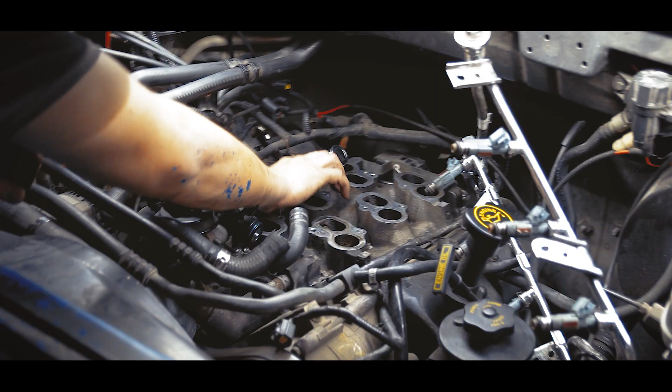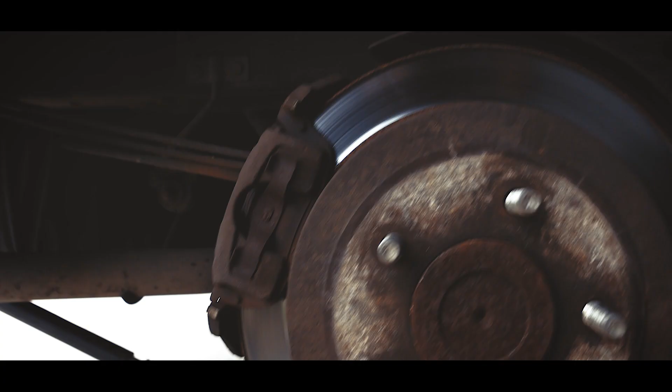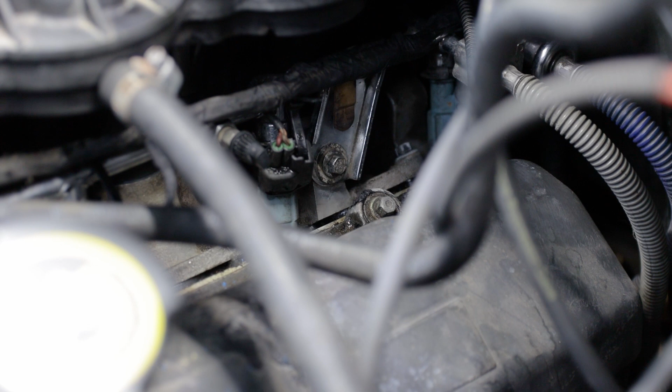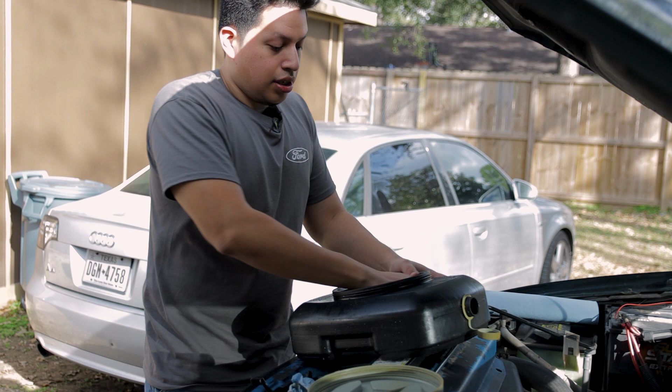We're gonna work on this on our 2001 Ford F-150 4.2 liter. We were looking at codes, trying to figure out why we keep getting misfires, and so now we found in a clip where we had an air leak on the intake gasket. So now we're gonna replace that gasket and make sure we put in the gasket properly, and show you the process of how, what to do, what not to do.

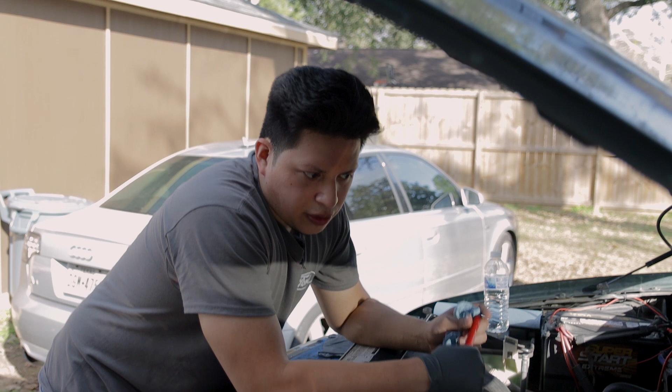So in order for us to remove the intake gasket on this, all this will be removed. So all this, like the plenum, all the air intake and so forth, you can see that part in our previous videos, like the one where we remove the control runner, and some other previous videos that we have. They'll show you the process of how to uninstall this.

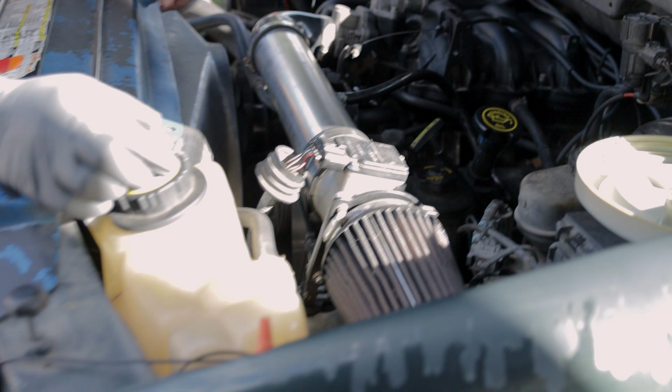Since we're gonna have to remove water for this case, obviously you remove your cap to release the pressure, and just to be safe, you don't necessarily need to. We're gonna remove the battery from the negative connection, and that'll be it.

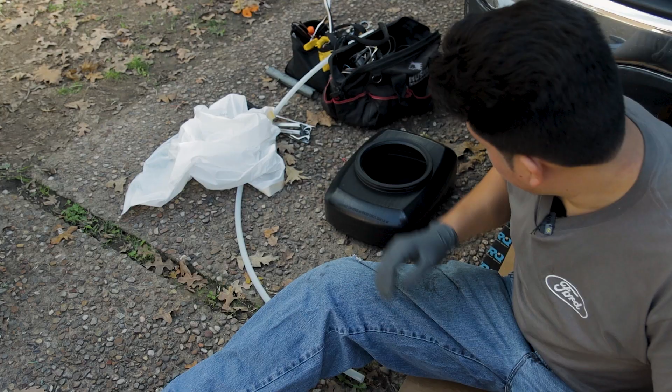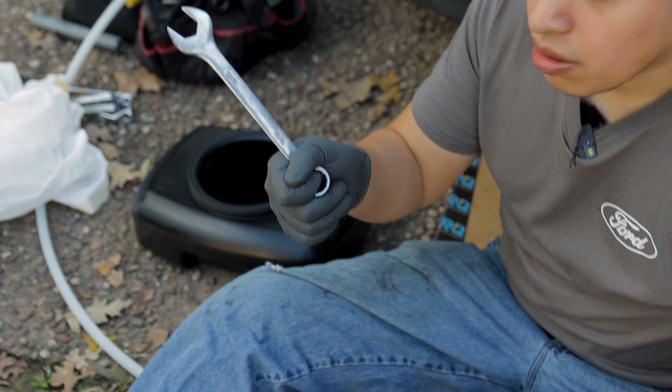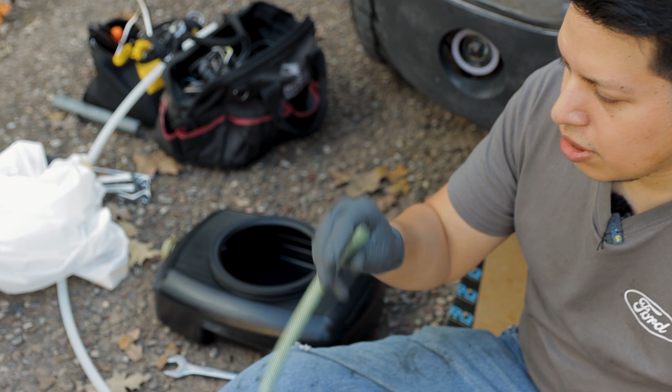All right, so we're gonna drain the coolant. You're gonna need at least a pan, you might need a bigger one than this, a 3/16 wrench to untighten the petcock, and then a little hose so you won't be spilling everywhere. It has a little drainage inside. We're gonna try to show you in a bit, but just to get you an idea, you have a little drainage, literally facing that way, so stick it in there.

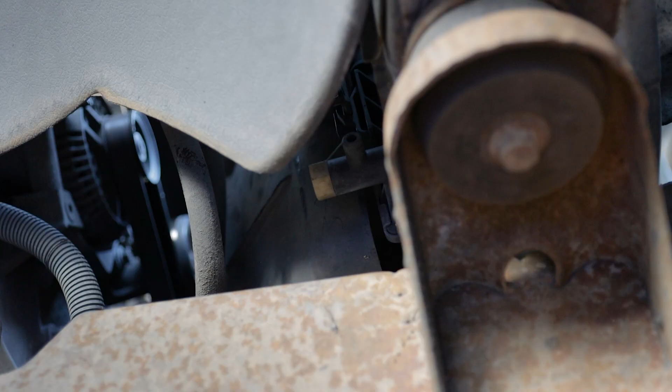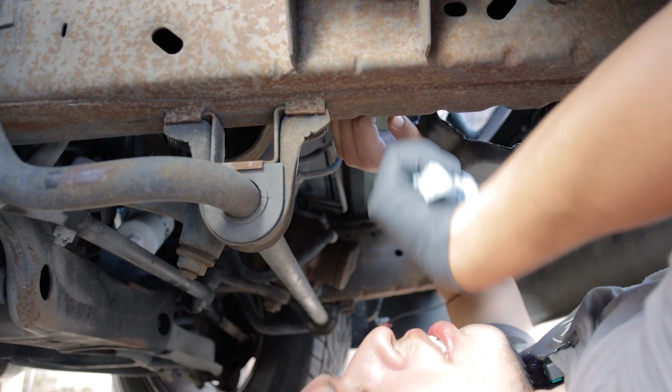All right, so here we have the petcock. It's right here, obviously on your passenger side of the vehicle. If you're not too familiar with it, you could just look at the radiator, and it's normally passing this part of the chassis upwards. So if you look towards the chassis, it's literally on top of this, as you can see with my finger, here, and here we have the little drainage.

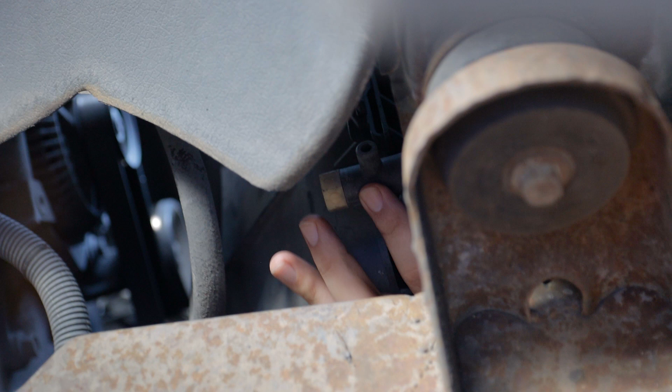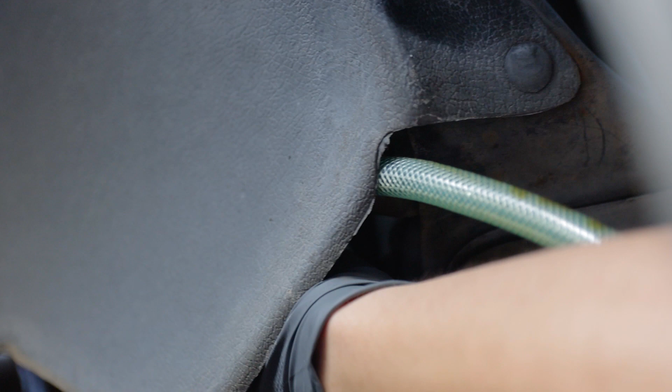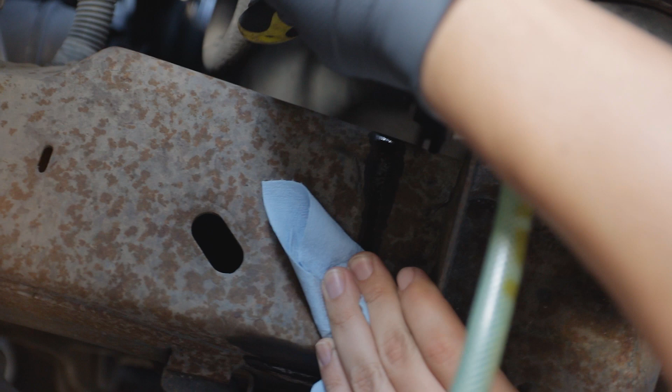I'm gonna stick this here. In case you're wondering, I think the diameter of the hose will be a little bigger, half an inch, as you can see with the little petcock nut. You don't have to remove it completely, just enough to where you'll start seeing the water coming out on your end. You might also see near where you're loosening up the petcock it starts draining a little by drops. So watch out for that and don't let it get in your eye.

And so here we go. That's all the water we have now.

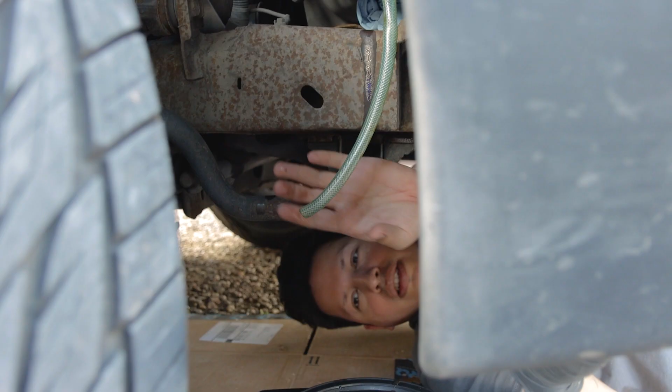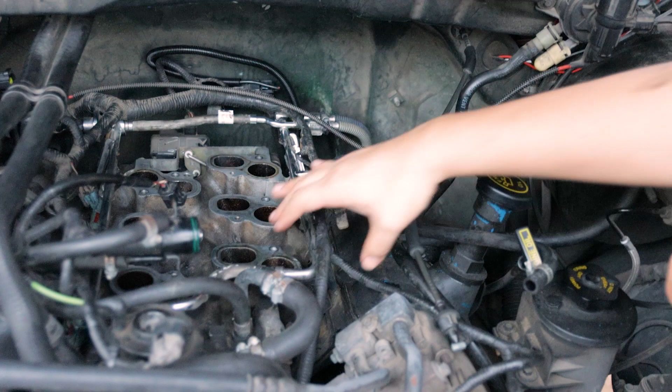All right, so we have removed the 4 screws from the fuel rails, they're 8mm. Once you remove them, this is basically removable. Right now we're gonna try to see if we could remove the intake without having to remove the fuel rails, but there might be a need that we have to remove them.

So first we're gonna start removing this hose, this hose as well, and this hose that touches the thermostat, and this little hose here. They're gonna have to be removed. So make sure that your coolant has finished draining. If not, you might wait, or if you don't want to wait, you could just go for it, but you might have some spills, so we're gonna do that now.

So as you can see, on most, if you haven't replaced these, your most original ones, they're gonna be clipped on, so you're gonna have to use pliers or something like that. I changed all of them to screws because it just makes it way easier to remove. But most, if I'm not mistaken, most of yours will still be the little clips, and you're gonna have to use pliers.

So just like I told you, move this one, and this one here, and that's it. So this is one of the hoses removed, this one was from here, as you can see it was removed. The one from the thermostat was also removed, and this little one here, which is this one, was removed.

Normally it's probably easier for you to remove the fuel rails from these ends here. We didn't do it, I guess you could say we were being a little lazy, but we went to play around and move through the cabling, because this side normally is all completely loose.

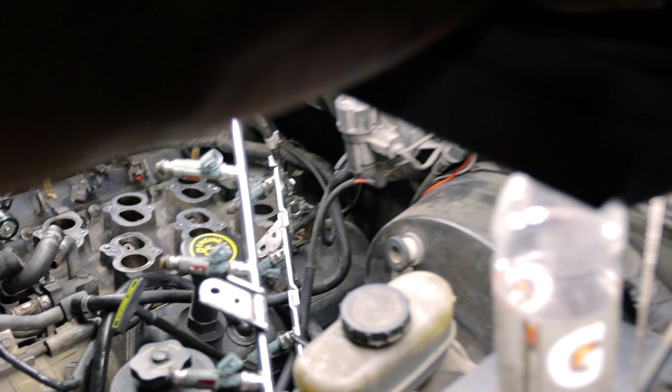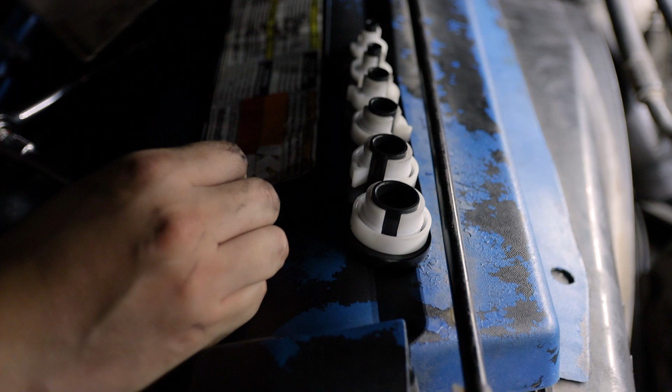So we can do it this way, but in case y'all do want to remove it, these are the tools you'll use. The big one we used, if I'm not mistaken, one of these two little ones, and that's the part number. In case you want to remove the fuel rails, you don't need to, but it's up to you.

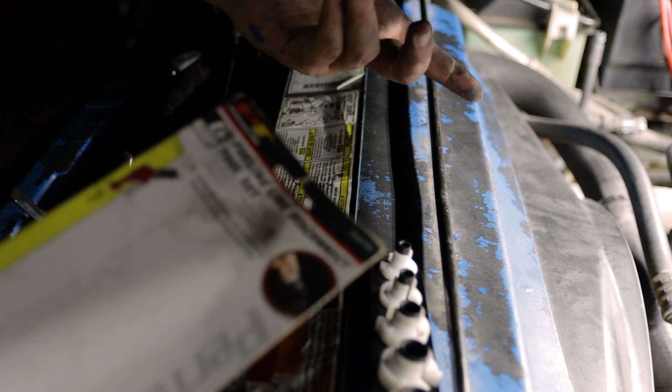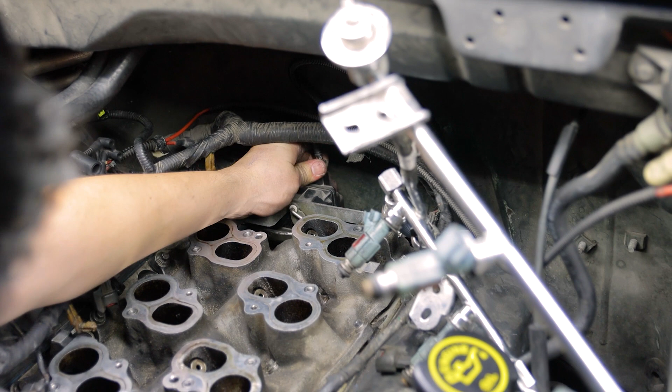Now we're free to remove the intake, and it has about, don't quote me on it, but about 13 screws. So it's one here, 1, 2, 3, 5, 6, 7, then 8, 9, 10, 11, 12, and 13. About 13 to 14 screws, and they're 8mm. Once you remove all those screws, don't forget to disconnect this right here, the control runner motor. And then it has like a little clip there. Remove it, and you should be set to remove everything.

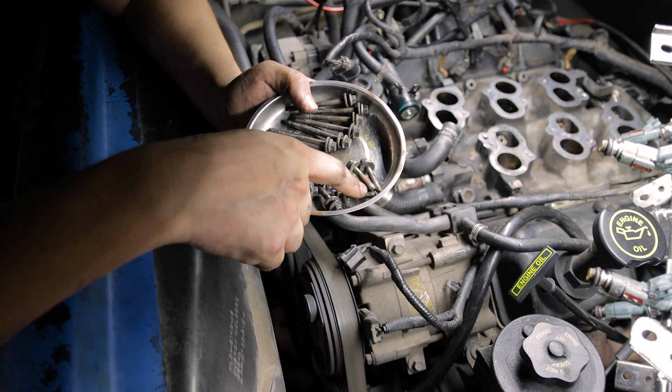All right, so we have a total of 8 screws. As you can see, these little ones go mostly on the edges, and you'll also have 2 small ones—one that goes here, and one that's way in the bottom, so you're gonna have to feel that one out. And then you have 7—I'm sorry, I'm lying. 1, 2, 3, 4, 5, 6 of the ones in the middle. So try to remember that the big ones go in the middle. How many in total? In total you have 14 screws, so make sure you have 14 screws—6 of the long ones and 8 of the little ones.

As we remove all the screws, now we're going to remove this. It's ready to go. Sometimes you might need a flat head or something like this, because it might be really stuck in there. But once it starts like this, you can move it. So this one you might either need 2 hands or another extra person. Also be careful because it will have water in it, and you don't want it to go into the heads or anything like that. Make sure to pull it out as much as you can, and make sure everything is moved out of the way so it's not gonna be in the way for you to remove it.

So let's see if I did what I just said. I was trying to remove this, but it turns out I do have to remove this because there's not gonna be enough play for it to be removed completely. So remove this hose. All right, so this should be... voila, people, voila.

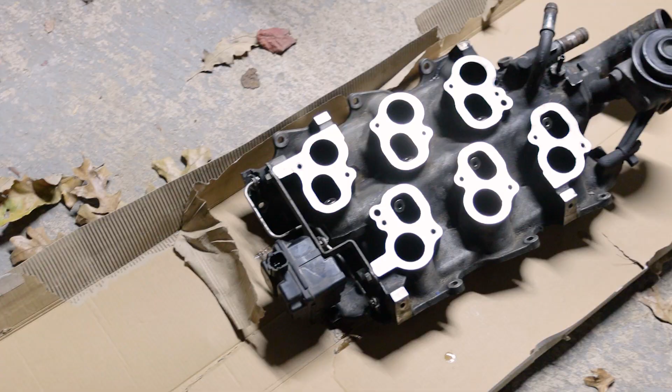Let me bring this—so now we're gonna clean it. Clean it with a carburetor cleaner. Clean here, clean the little part of the engine as well, and clean where the gaskets are at the moment. And then after that, we will put it back.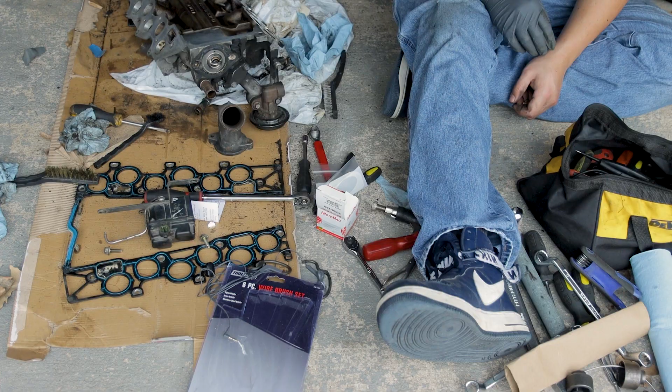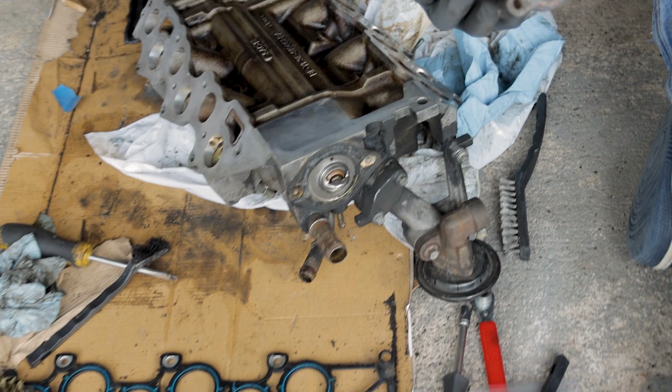All right, so here we have the intake manifold, which we have been trying to clean and stuff. It was dirtier than this. Also, it's normally suggested that you swap out your thermostat since you already removed this. So basically, this is here—you have these 2 screws, which are 8mm. Obviously remove them, this comes out, and then your thermostat is here. So the gasket you could get to use is this one, and then this is the thermostat.

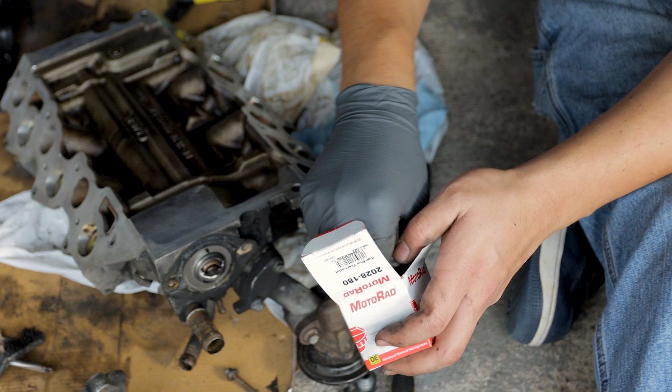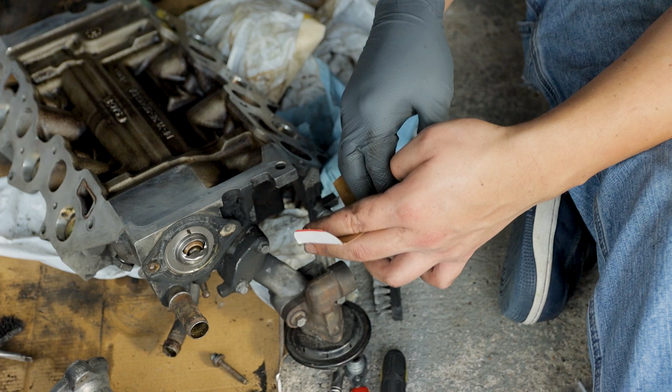They have different brands, but the one I use is this one—check it out from Rock Auto. And that's about it. Just obviously when we take this off, try to clean and make sure all the old gasket stuff is off. Just clean properly and put everything back on.

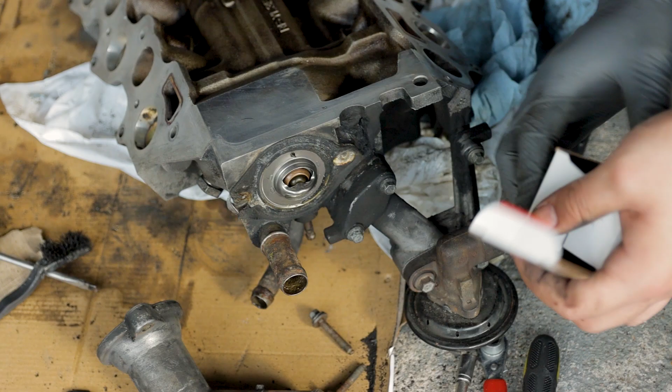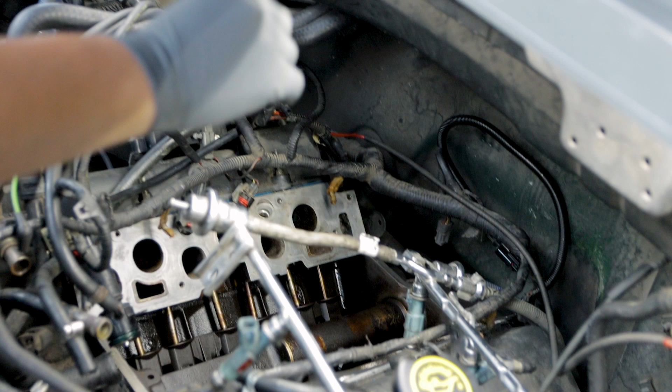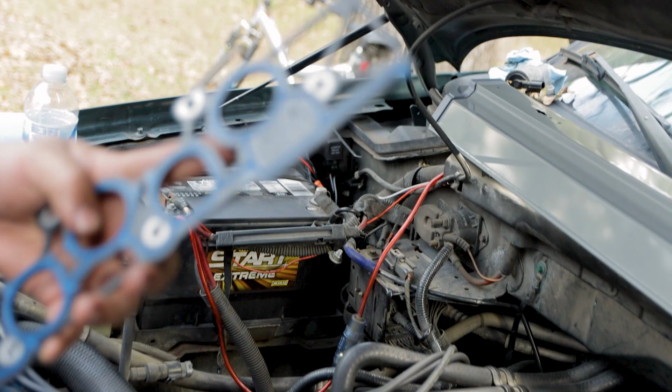All right, so here we have the gasket for the intake. It comes like this, and 2 of these go on the side of the heads. Then these little extra gaskets go on the edges, one in the front, one in the back. So when you start with this, make sure—even though you put it on, you might notice it goes wrong—but either way, this comes with a left side and a right side. So obviously our right side, and I'll tell you what part would be front. In our case, this is the front, that's gonna be the right side. We go here, and just make sure it goes on—here on each end you have little holes for these pins to stick in. Make sure they go in there.

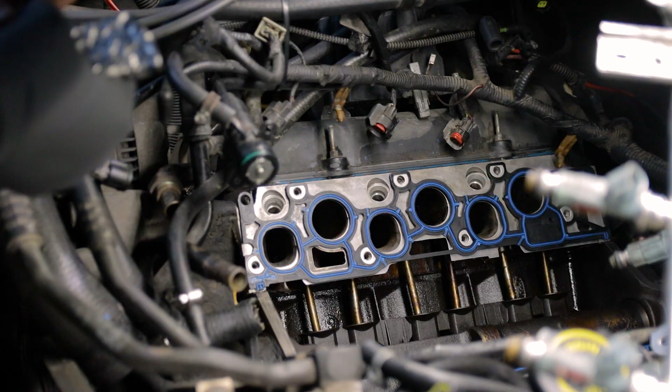All right, so once you put the bigger gaskets on left and right side properly, your next ones are gonna be these, this and this one. Luckily, this one goes in the back and this one goes in the front because of the way it's shaped. You'll be able to notice which one goes where. The first thing you're gonna have to do is put sealant on here and the back as well before you put these.

So just run a gasket through it with the gasket sealant. Let's do the back first. Let's put this one on. Do that, do this. And once that part of the gasket is properly seated on, you're gonna have to put it also here on the edges.

And this same process is going to be done for the back. So we have applied all the sealant under the small little gaskets on front and back, and also we put it on the edges, and we also decided to put some on the top just to be safe, wouldn't hurt.

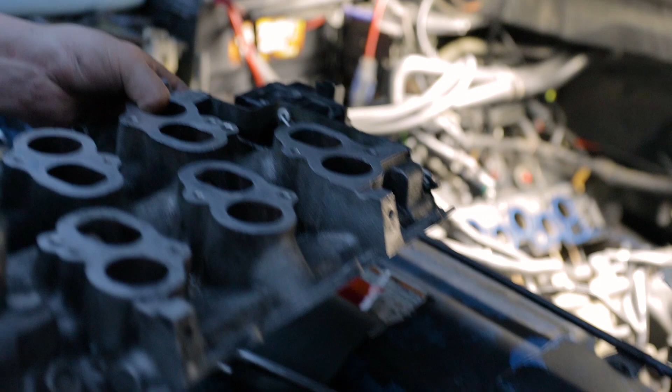Now we're going to apply the intake manifold. In this case, I would say if you change your thermostat, which we did, we showed you previously how to do it. Also inspect these little plastic connectors here, right here, just 1, 2, and then you have 2 extra ones at the edges. Sometimes those go really bad, and it'll be a good thing to replace them. Ours are fine, but in case you're doing the job and yours turn out bad, might as well try to order them ahead of time.

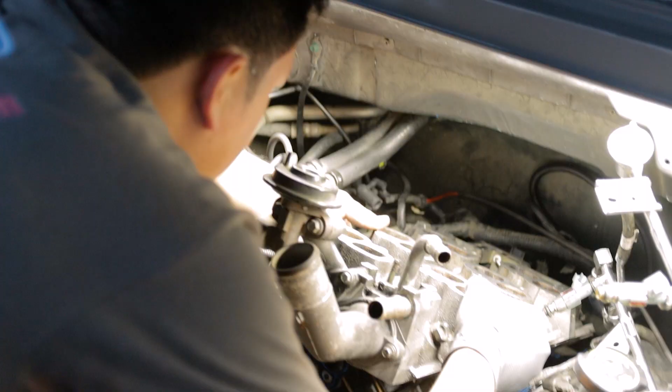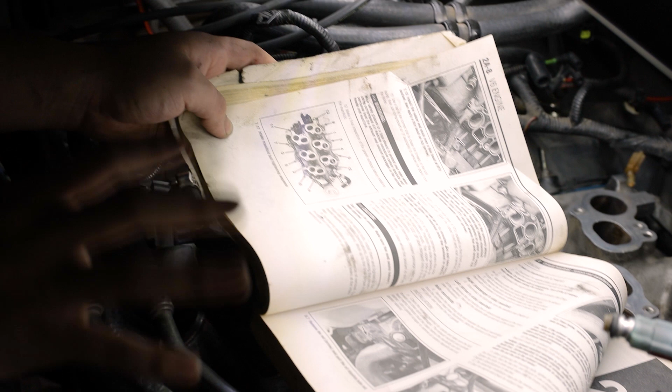And then now we're ready to put this back on, and obviously clean it. All right, once you put in the intake, you sit it down on top of the gasket you put. Make sure everything, with your hand, try to check that the back one didn't move from place or whatever. And once that is done, we'll put on the bolts.

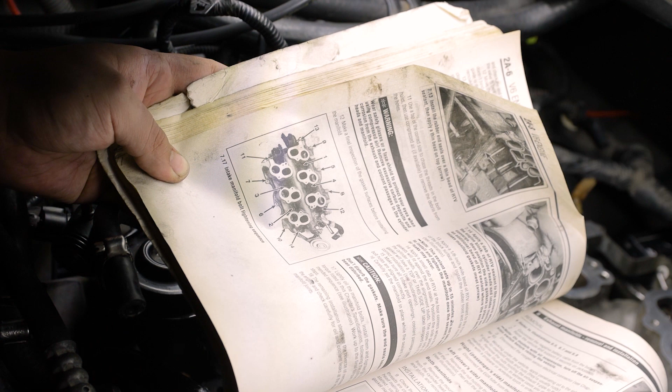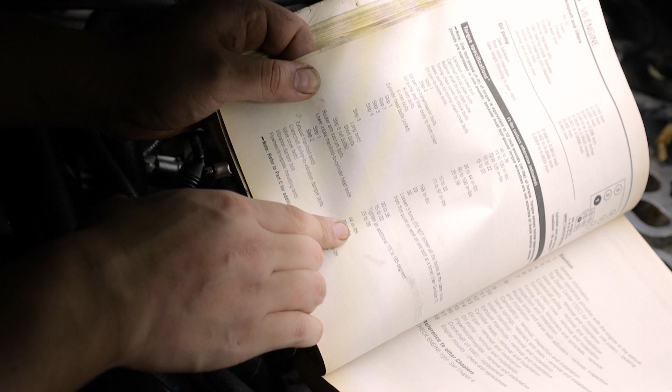So here, if you can see, here's the pattern, you can follow the sequence. This is the lower intake manifold that goes to the cylinder head bolts. First step will be 49 inch-pounds of torque, and then your second step will be 89 inch-pounds of torque. So once you put all the bolts and torque them as expected, first step is 49 inch-pounds, and then about 89 inch-pounds for your second step.

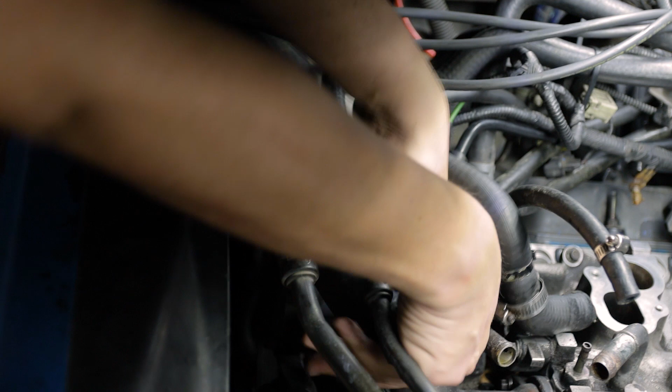Now the next one is going to be this right here, the middle hose that connects to the EGR valve. We'll tighten it later, but obviously don't forget to tighten it. Then the second one will be this hose right here. It goes here.

Then you can put in this one, the little one goes in here on top of this one. And obviously then we'll tighten it. And then lastly will be this one right here.

Put this in first because normally it's a little easier. Just stick this here, and voila. And then just tighten them up. Also, don't forget to put this back here before you start putting everything else, because it'd be hard to get back to it.

Yep, until you hear it click. And also inspect all your wires, like for example, just now we had this one come out, so we're always going to be putting it back in. Make sure they're back in there.

All right, so now that we have tightened it and put on the hoses, this one that goes to the thermostat, this little one that goes on top of the intake manifold - now we're gonna put back the fuel injectors. Make sure they're all sitting correctly in the hole ports. And then once they are, you can start connecting these connectors into the fuel injectors, my bad.

We put in the screws, 4 of them, and installed the fuel rail. We tightened the 4 screws on it, connected everything, and made sure the fuel pressure regulator has its hose back on. Now we're ready to put the upper part of the intake on.

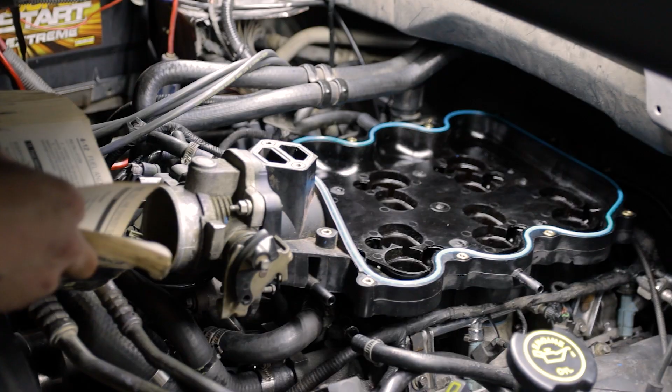Make sure it sits all right once you put it on there, and doesn't move anything or bind up. All right, so now we're going to screw the intake manifold spacer, which is this one.

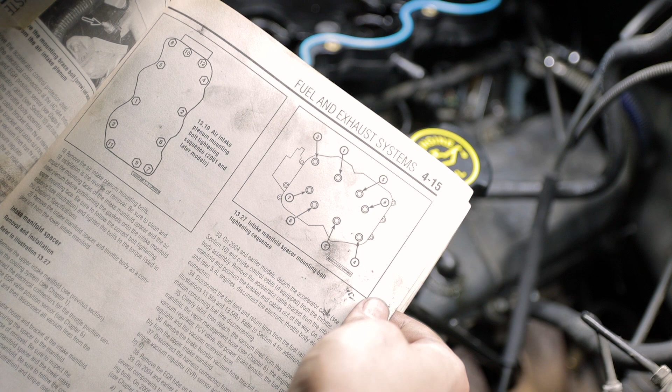Here we have, as you can see, the order tightening sequence. Normally you could just tighten it, but we're going to follow it for the video. Step 1 is 53 inch pound torque, step 2 is 89 inch pound torque.

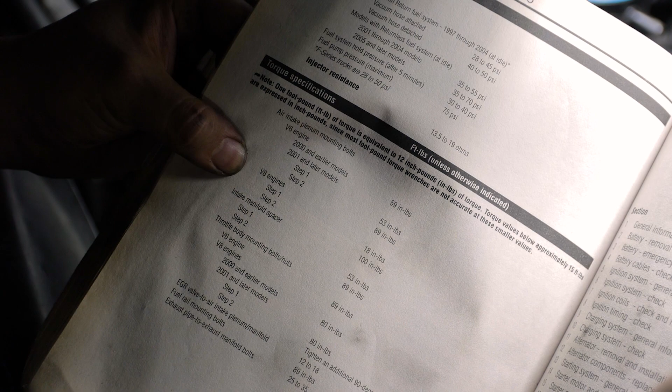Once you screw all this, also make sure to remember to put this hose in here. Then you have this hose that goes from this drum here to here.

If you come on the other side, you'll have this that we took off previously, which connects here. Don't forget to connect the 2 screws, one here and one on the bottom, so they're across from each other. Also put this little bracket back into this here, and screw it down. Then connect this little backing thing.

It has 2 little hoses that connect also at the bottom. See that green one? It has a red one at the bottom, so they connect to this too. This hose also connects back into it. Now we're going to screw everything back on.

All right, so we've finished tying up the upper intake manifold, put all the hoses and connectors back into it. Now we're ready to put the top one in.

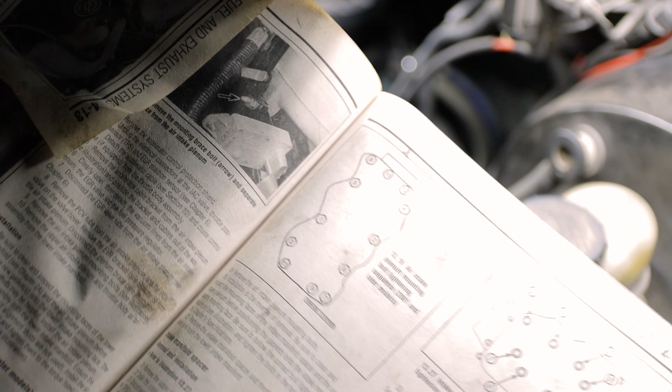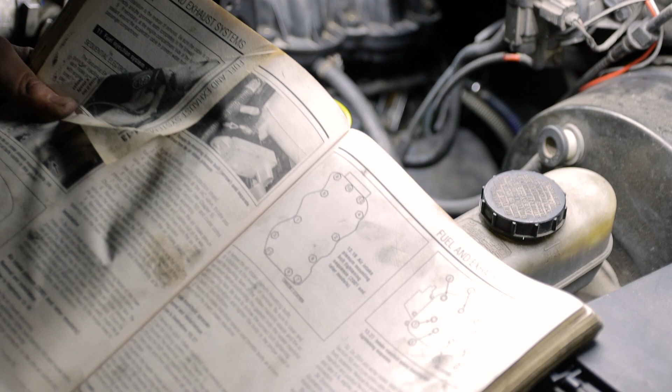Basically, once you get to this state, you're basically done with everything. You'll follow this sequence here: this is your front, this will be the back, and just follow the sequence to tighten it. This one I really just do by hand, so there's no need for torque. You're welcome to look it up online if you want, but it's not really needed.

Once you tighten up everything, put back in your accelerator cable and cruise control cable. Obviously it'll go in here, and just make sure it's stuck in place.

You put your air intake back in. You might have an aftermarket one, or if you have the original, you basically put it back on and connect it. Connect this wire back on.

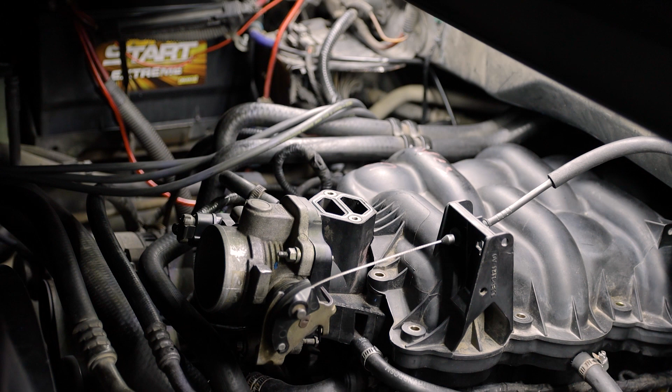Then just connect, and don't forget to connect this — if I'm not mistaken, the idle air controller, I could be wrong on the name — back on it. And we'll basically be done.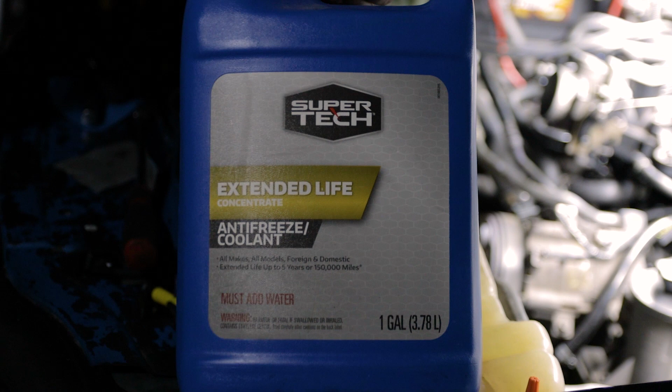Also don't forget to put the coolant in. We're going with this — you can use it, but you'll have to add water to it. The way I do it is get a measuring cup, let's say half a cup. Put half a cup of antifreeze first, then half a cup of water, and just keep going until it's completely filled.

Once you turn on the car, the water is going to start recirculating, so you'll have to add as needed. Once that's completed, you should be done, and that's pretty much it. Make sure your petcock is locked before you start putting the water in there. Other than that, this basically concludes the video.